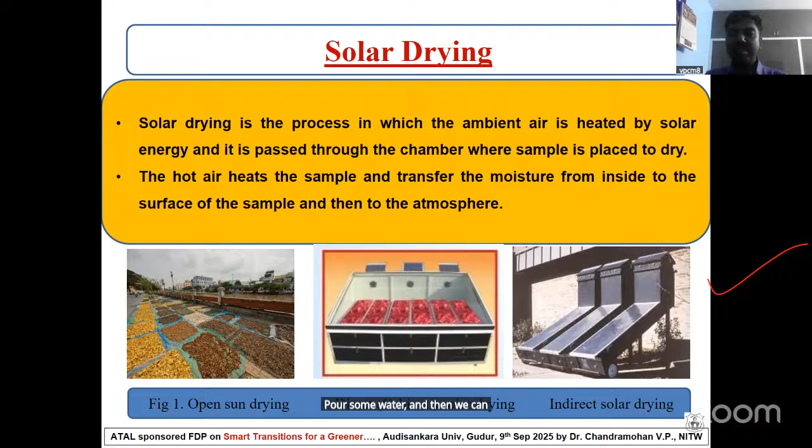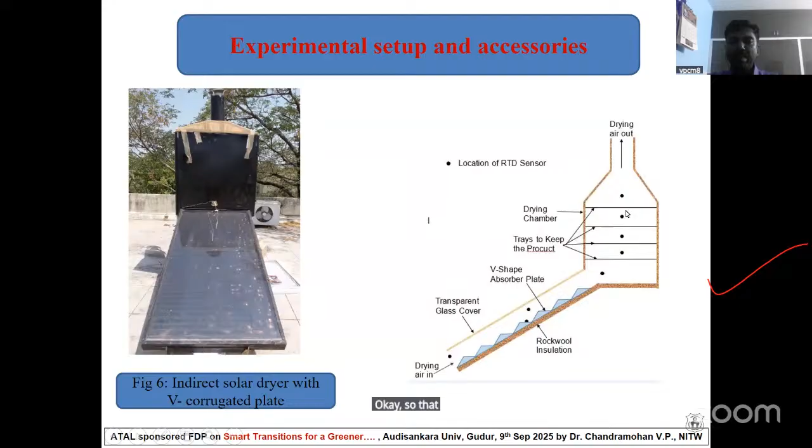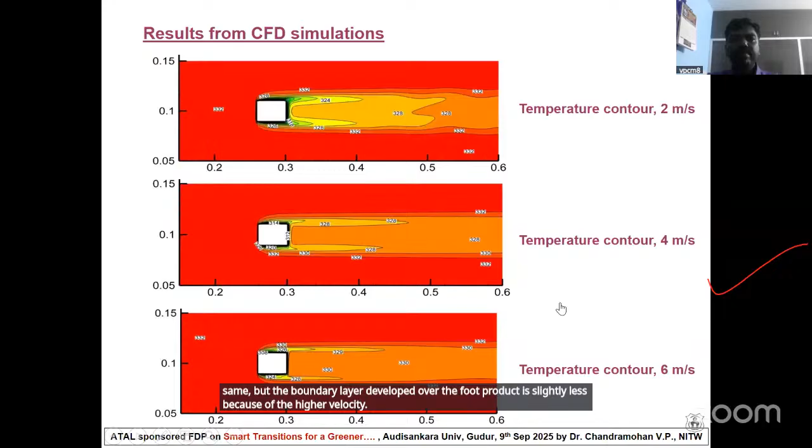So these types of studies help us understand how heat transfer will take place, how mass transfer will take place from the product. This can be evaluated with the help of CFD simulations. There is nothing more to explain here because 4 and 6 meter per second always produce a uniform temperature profile and a symmetric velocity profile.

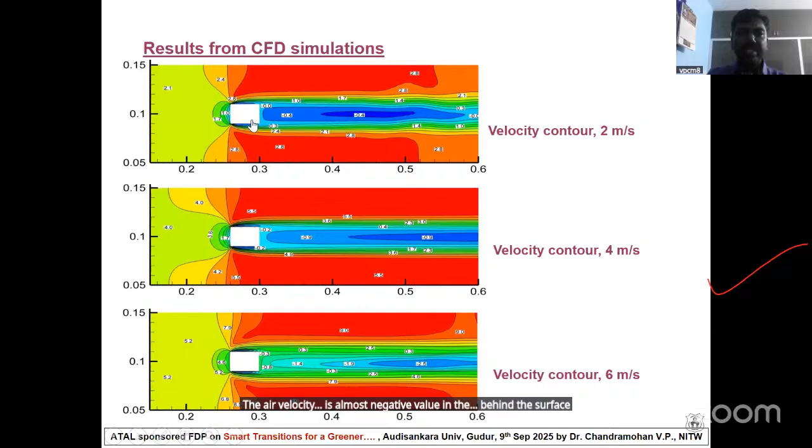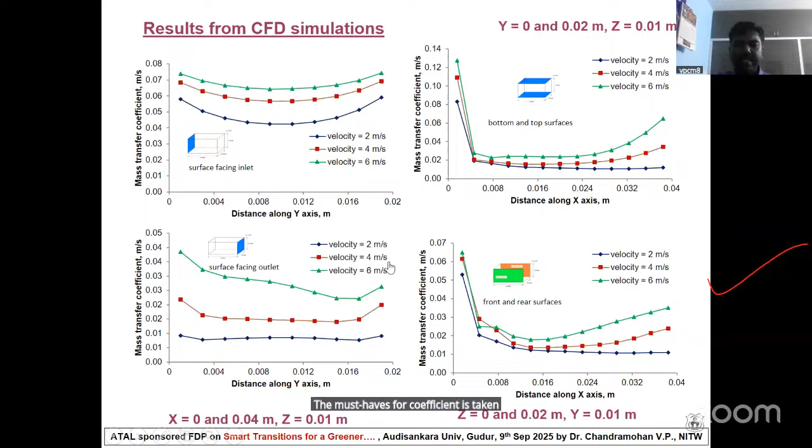Actually we solved this problem in 2007, 8 times, because those days the computers were not very effective to solve these equations. This itself was taking almost 7-8 hours, since it's a three-dimensional case, each simulation took 7-8 hours. But nowadays very costly, powerful computers came. Because of that lack of computers, we couldn't add the radiation effects. You can add radiation effects also, but then the code will be a little complicated. Maybe present day computers can solve it, with a little difficulty, but we can be able to solve it.

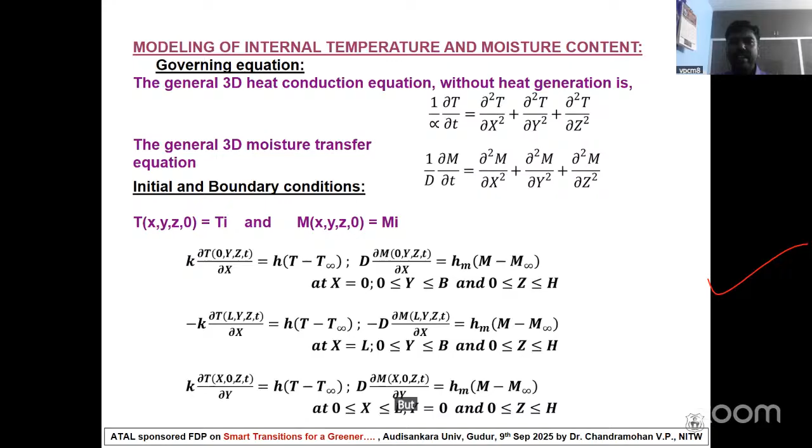So now I could visualize the temperature distributions inside the food product. I told you it's a rectangular object kept in the tunnel. In this case, you remember, there is a rectangular object kept inside.

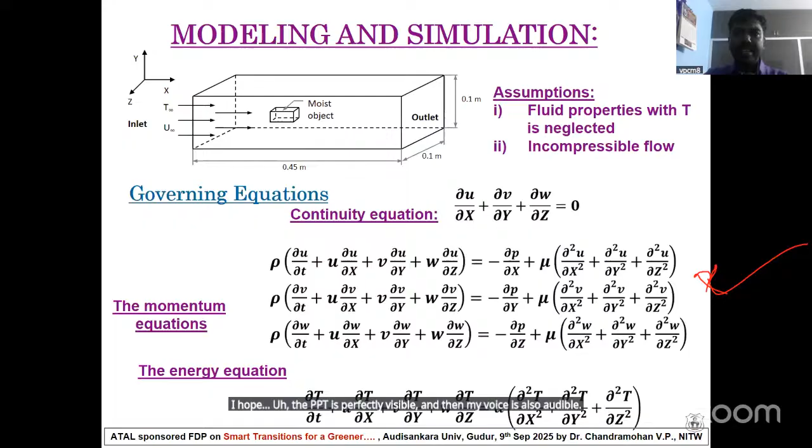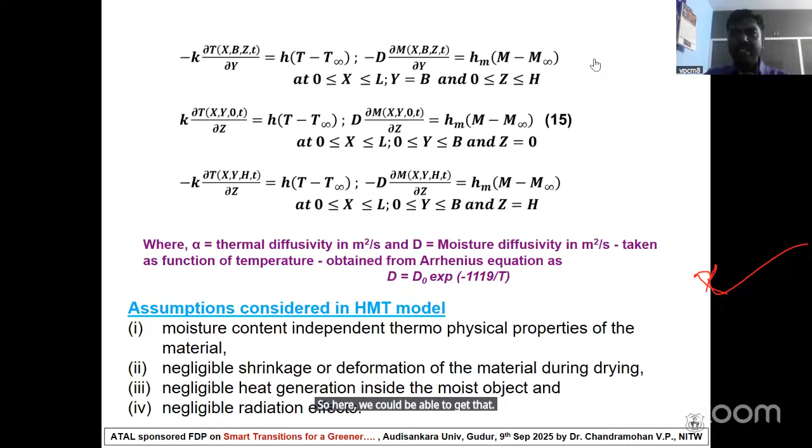In MATLAB, some inbuilt options are available. Some matrices can be directly taken by calling the subroutines, so you can solve it in MATLAB as well.

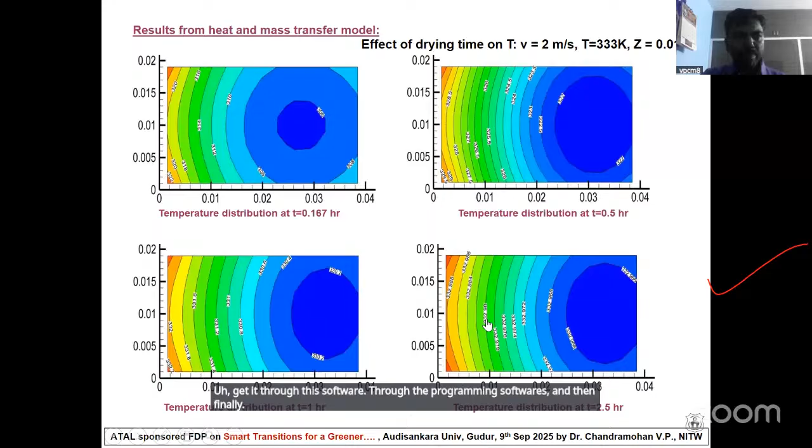It is natural - whenever we dry food products, it's a time-consuming process, it takes its own time. As time increases, the product temperature always increases. We could capture this natural behavior through the software, through these programming tools, and the results are plotted using the TecPlot software. So this is where we get the temperature distributions, for velocity at 2 meters per second.

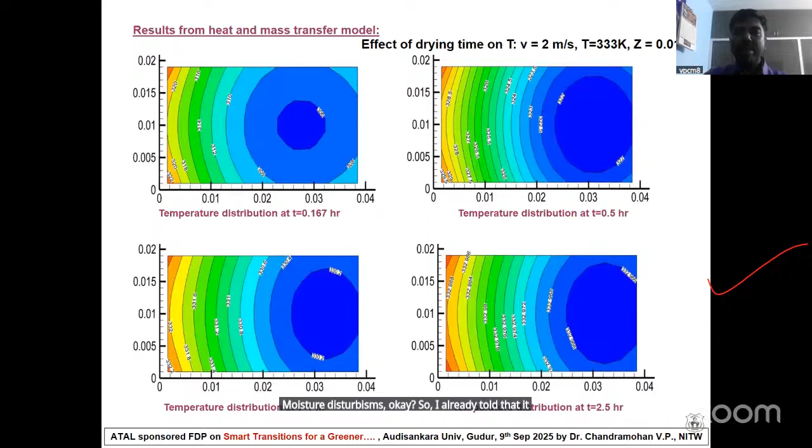Similarly, we could get the moisture distributions inside the food product. As I mentioned, it's always a heat and mass transfer process - when we solve the heat transfer equation we get the temperature distributions, and when we solve the moisture transfer equations we get the moisture distributions.

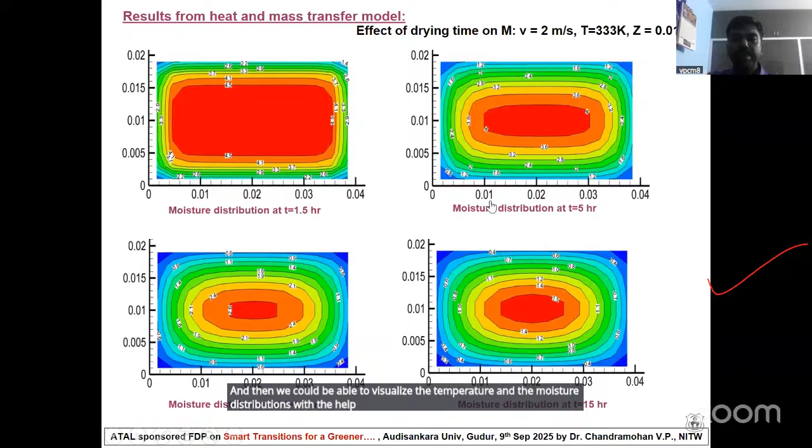So now this is another one we solved. I think it is a green pea. Did I mention it anywhere or no? Green pea. Yeah, maybe it's a green pea. Spherical food products. Green pea means Pache Patani in Tamil, and then in Telugu it is, what is Telugu? I don't know. Green pea.

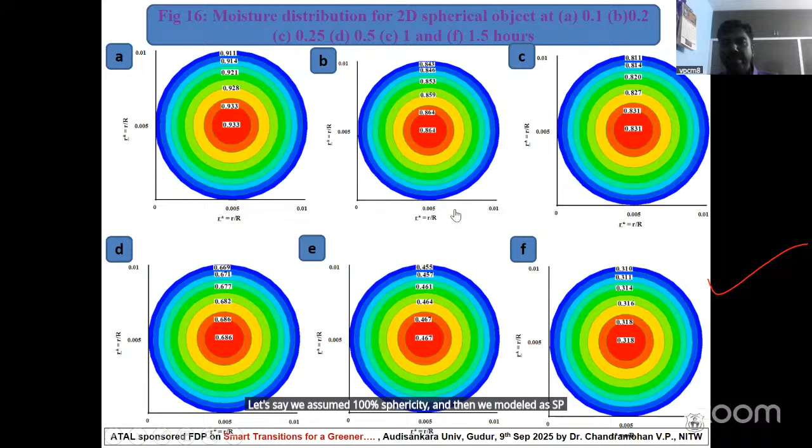Actually, green pea is not a perfect sphere, but we assumed it's a perfect sphere and then we solved the spherical equations. Previously, we have taken Cartesian coordinates, since it's a rectangle, potato is taken. This green pea is spherical, almost 95% sphericity is there. That's why we assumed 100% sphericity, and then we modeled it as a sphere, and then we could be able to get the temperature distribution inside.

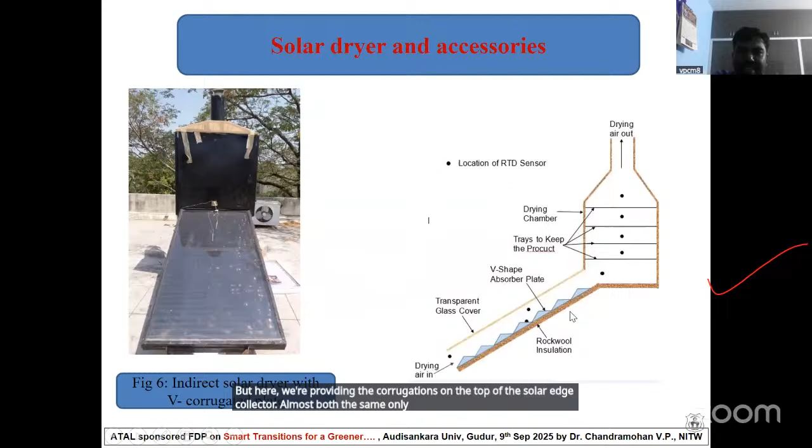So that also we are solving one by one by using the CFD techniques, and almost all the works are published, and still we are working on that. So here instead of a triangle corrugation, we are providing the square corrugations. The same problem is taken and we are solving here. Here the corrugation is on the bottom side of the solar air collector, but here we are providing the corrugations on the top of the solar air collector. Almost both are same. We are slightly tilting the device and then doing the CFD analysis.

1 minute. I will be checking my battery level. Yes, it is coming down. So 1 minute break I will take. I will connect the computer.

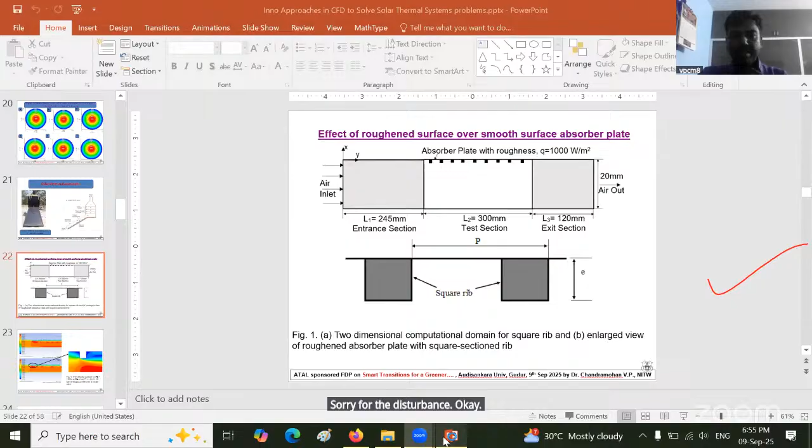Sir. Yeah, so here we are providing the corrugations, square corrugations on the top of the plate, and then we are sending the air. The remaining thing is everything is same. We are assuming here 1000 watt per meter square of solar insolation will be reaching to the surface, and then we have taken some entrance section, test section, and then exit section. The air is sent in at the inlet, and then air is sent out at the outlet.

Actually, this is the zoomed view of the two consecutive square ribs. The distance between the two square ribs is pitch. The pitch is varied in our case. In what pitch we will be getting the maximum heat transfer, that was estimated through the CFD analysis. And then this height also varied. The height is taken as a small e.

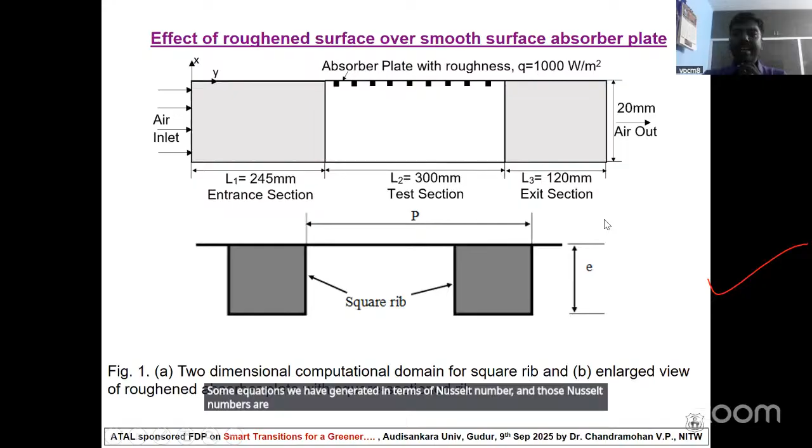So these things we varied, and then we could be able to provide the optimized pitch and height of the square corrugations. And then from that we could make some equations. Some equations we have generated in terms of Nusselt number, and those Nusselt numbers can be used directly in your system, and then we can estimate the heat transfer coefficient or whatever it is.

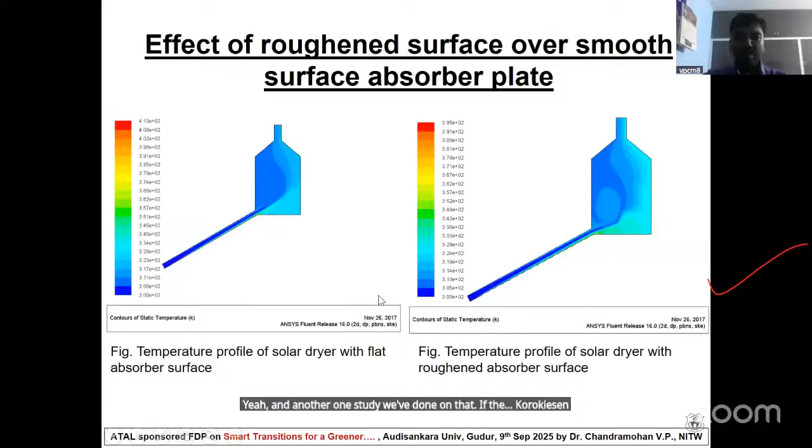Yeah, and another study we did on that. If the corrugation is a smooth one, smooth means theta is equal to 0 degree. The angle of the corrugations will be 10 degree, 15 degree, 20 degree. These things we studied, but we couldn't find much phenomenal development. But anyway, I mentioned it here; maybe it will be useful to you. You can also do similar simulations. If you change the angle again and sometimes get a better mixing of the air, then that may give a good result actually.

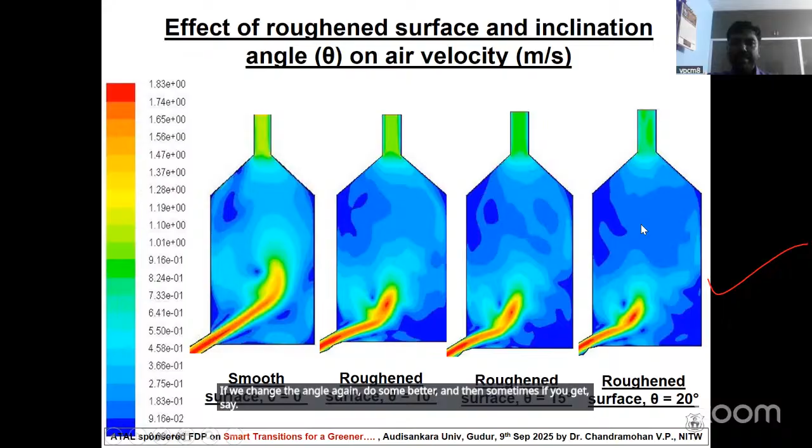Yeah, this is the inclination angle. Theta at 20 degree, 10 degree; 10 degree is almost giving some good mixture. 15 degree also it is okay.

This also shows the drying chamber temperature distribution inside. So this is the first setup, the solar dryer. Whatever I explained, we have done almost 10 CFD problems. All the works are already published. So there is still a lot of hope for solar dryer problems with the help of CFD.

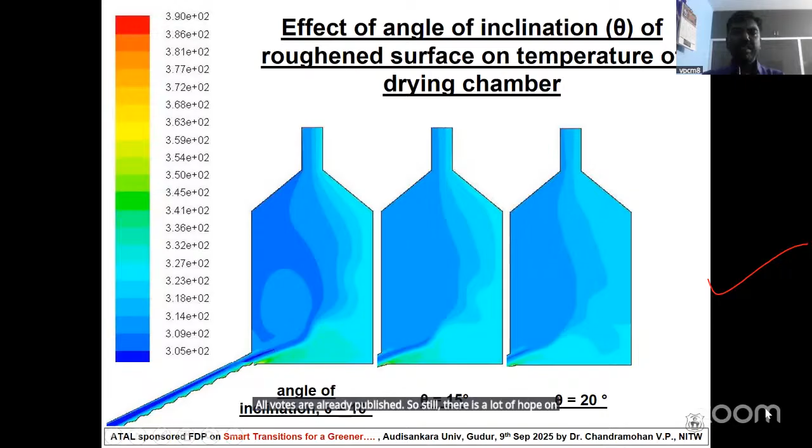The next work is the solar updraft tower.

So before going on to that, sir, shall we go through all the topics and then keep the question session at the end, or can we cut in between, sir? So we can finish it up, sir, and at the end of the session we have questions. Oh, okay, we will go on with that.

Okay, so the next setup is called the solar updraft tower. This we also developed in our laboratory. Laboratory means it's not a laboratory, it is developed on the rooftop of a building. Actually, this setup was first developed in Manzanares. The city name is Manzanares. They developed this plant in around 1985.

This is the tower or chimney. The chimney height is almost 194 meters. They didn't construct all of it. Some portions of the chimney were constructed, and for some portions they took the help of a real hilltop, because this plant was developed on a hilltop. In the hill there is a natural hole, and in some places they provided chimney sections, and in other places it is the natural hill.

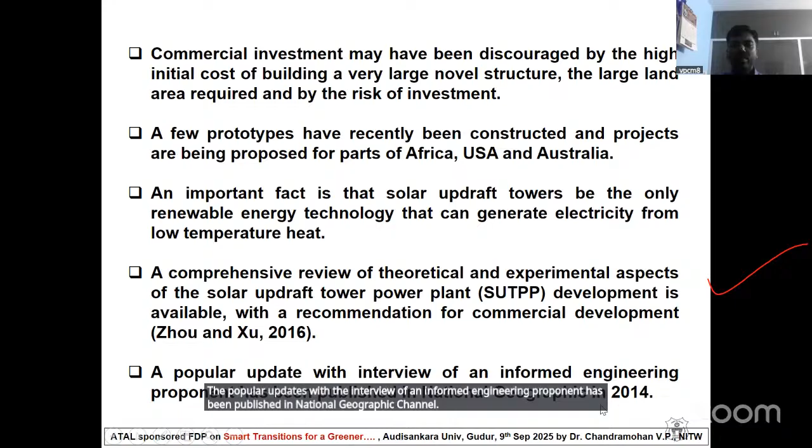Okay, so already one review work is reported in 2016 by Zhou and Xu A popular update with the interview of an informed engineering proponent has been published in National Geographic Channel. One video is there in the National Geographic Channel. Already I have seen that one. There are some design factors that must be taken care of here. The power output depends primarily on two factors. One is collector area and another one is chimney height.

Okay, the collector area is as large as 7 kilometers diameter. So could you imagine, 7 kilometers diameter. Such a huge circle is needed. So is it possible in cities and towns? It is not possible. But even in cities some secluded places will be there. A 1 kilometer diameter solar air collector is planned, but 7 kilometers is not possible. Then we need some rural areas or desert areas. In those places we can think about this 7 kilometers diameter plant.

And then the largest chimney height is up to 1 kilometer. Is it possible? 1 kilometer height chimney. Have you noticed anywhere a chimney height of 1 kilometer? Any industries? I could see around a 500 meters chimney in Hyderabad. There are some coal power plants there. Cement factories are there. They are using very big chimneys. Whenever you see it naturally, the height may not be visible, but the real height is almost 500 meters. Such type of construction is needed in this case also. Then we can extract more electrical power.

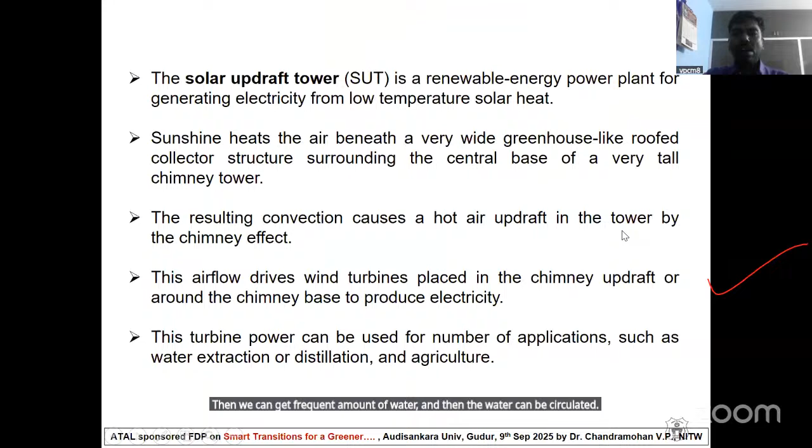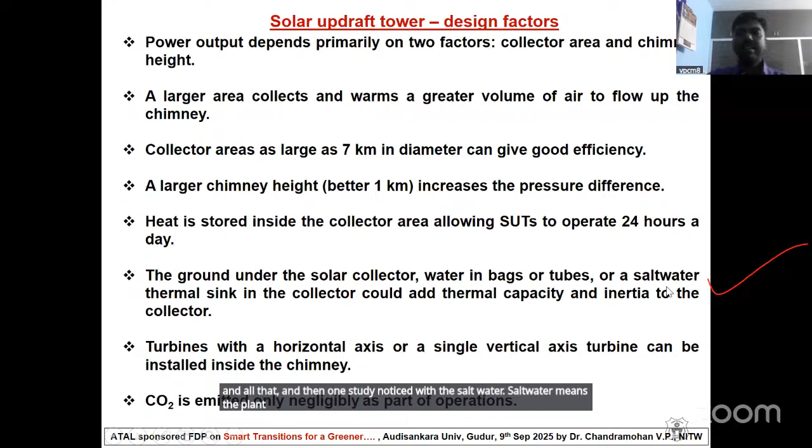Water tubes. If the solar air collector diameter is almost 7 kilometers, then we need to lay a lot of water pipes. Then it is sometimes tough to get that much water. Then that plant must be kept near seashore areas or river shore areas. Then we can get a frequent supply of water and the water can be circulated. I noticed one such study with water bags or tubes inside. And then one study I noticed with salt water. Salt water means the plant is kept near the seashore and therefore they are taking the salt water.

Okay, the concept is almost the same as the concept of a nozzle or diffuser. The purpose of the nozzle is to increase the airflow velocity. If the airflow velocity is more, then the air has more kinetic energy. Then the turbine blades can extract more kinetic energy. Therefore, it can produce more speed. Therefore, we can extract more electrical energy. That is the concept we are using here.

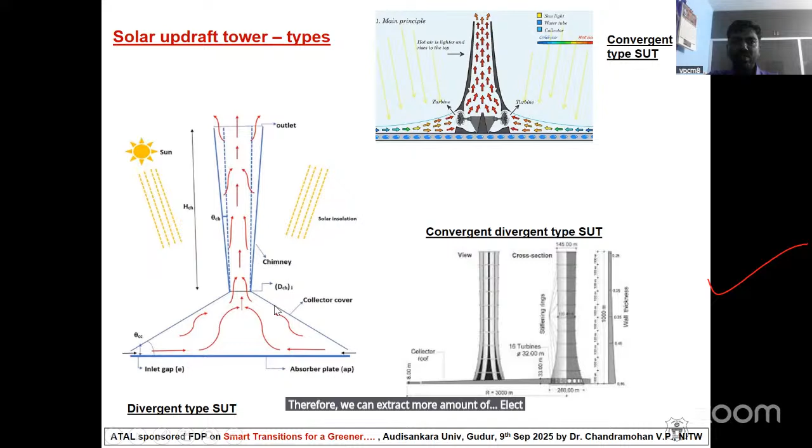Different types of plants are used here. Now we have used CFD techniques, and we solved the same problems, and then we could get the velocity distributions and streamline distributions inside the setup.

The system must be modeled using modeling software. ANSYS has modeling software, or you can go with SolidWorks or CATIA. Then the model can be incorporated in the CFD tool, and we can run the simulations. In the simulations, we need to solve the normal governing equations like energy, momentum, and continuity equations, and then we can get the velocity and temperature distribution inside.

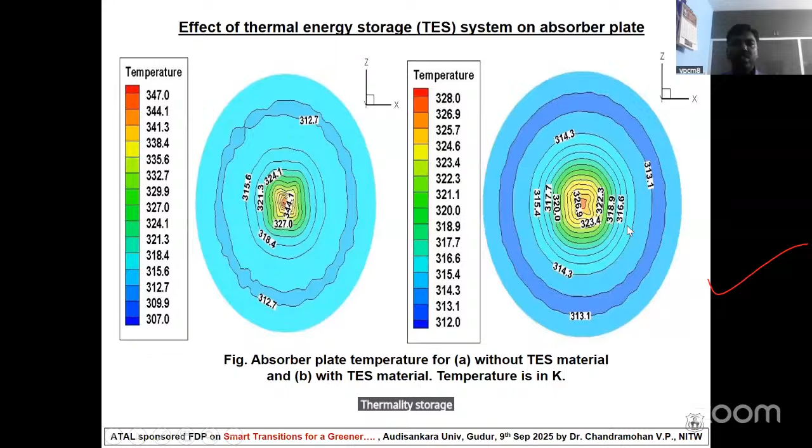This is the effect of the TES system 1 centimeter above the absorber plate. This is the air temperature, not the absorber plate temperature, how the air temperature looks just 1 centimeter above the absorber plate. Here the maximum air temperature is higher, almost 340 Kelvin at the center of the domain without the TES system, but with the TES system, the temperature is 318 Kelvin only.

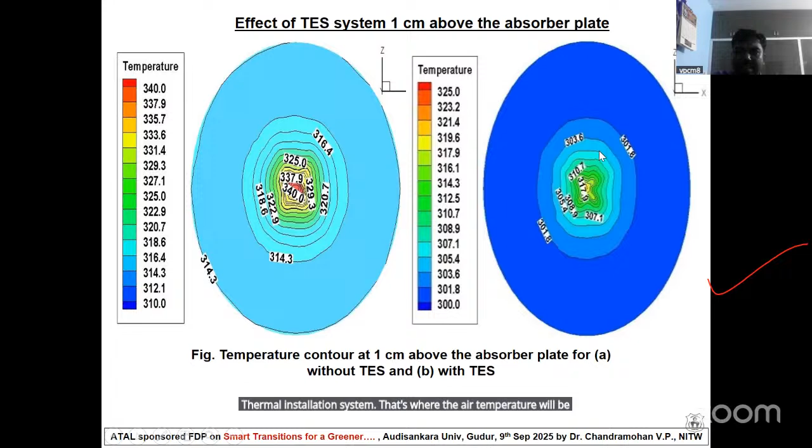The reason is the same, because if you keep a thermal energy storage system, the copper plate absorbs the heat and conducts it into the thermal energy storage system. That's why the air temperature will be somewhat less with the TES system.

But at the same time, if you provide the TES system, the system can run even after sunshine hours. Even after 5 o'clock, even at midnight or beyond, the system can run. Without the TES system, we cannot run the system. That is the only disadvantage of the first system. The advantage of the second system is it can run round the clock.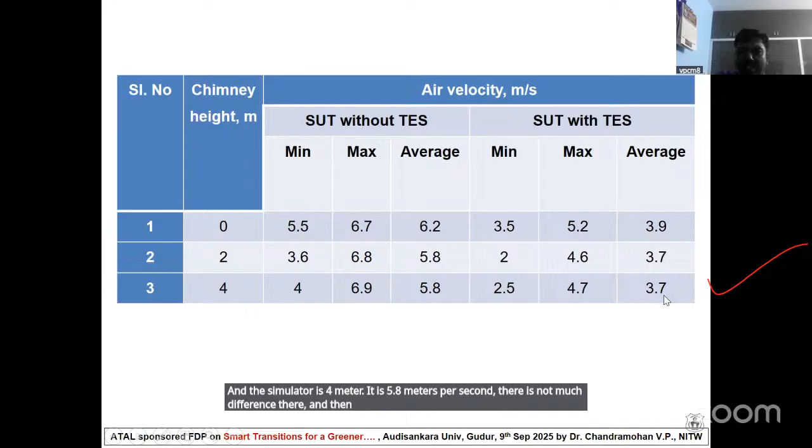At the same time, with the TES, the maximum average is only 3.9 meter per second. When the height is increased to 2 meter, the average velocity is 5.8 meter per second without TES, and reduced to 3.7 meter per second with the TES system. When the chimney height is 4 meter, it is still 5.8 meter per second, not much difference, and average also 3.7 meter per second with TES. There is not much variation.

So now the influence of the chimney height. Actually, in our system, we developed up to 6 meters only. If the height is increased beyond that, how will the air velocity increase? So three different locations: at the inlet of the chimney base, inlet of the system, and outlet of the chimney. At these three locations, we estimated the air velocity for different heights.

You can see when the height is increasing, the air velocity is always increasing. If the height of the chimney is increased to 10 meter, 20 meter, 30 meter, 50 meter, 100 meters, 200 meters, we'll be getting an enormous amount of air velocity. That is the conclusion we could get here.

And then the collector roof angle. So here the collector has an angle. This angle we adjusted for different simulations. It ran for 10, 20 degree, and then 25 degree, 30 degree, 35 degree, like that we did different cases. There is not much variation in the maximum air velocity. This shows that this angle we have chosen based on Warangal's latitude and longitude.

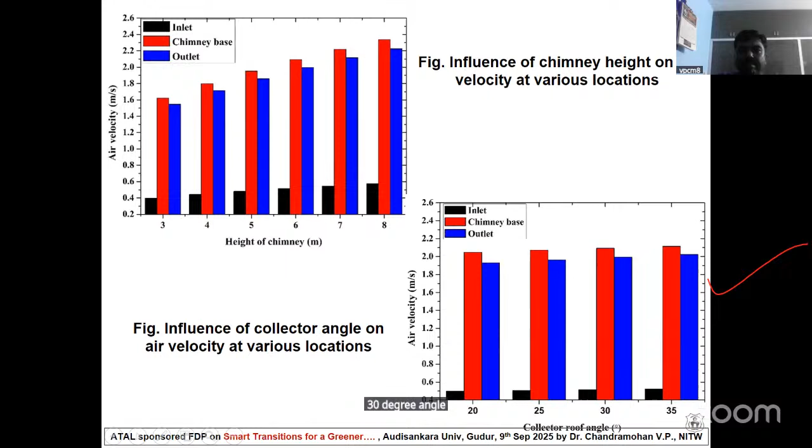The effect of absorber plate diameter on air velocity. Actually, the diameter we chose is 3.5 meter. But if the diameter is increased from 2 to 12 meters, you can see the air velocity is always increasing. Therefore, in the theory they told that there are two important parameters: one is diameter of the collector, and another one is height of the chimney.

Now I could estimate the volume flow rate, velocity, theoretical power output, actual power output, overall efficiency, and chimney efficiency for different chimney heights. When the chimney height is increasing, the theoretical power output always increases, actual power also always increases, overall efficiency always increases, and chimney efficiency always increases. This shows that if you take a good height, we can get a very good overall efficiency.

Anyway, these heights could produce very small power output only. The maximum is 0.3573 watt theoretical power. Actual is 0.238 watt only. If the height is increased, we can get a good result. We can do the simulations for those things also, and we can estimate the overall efficiency.

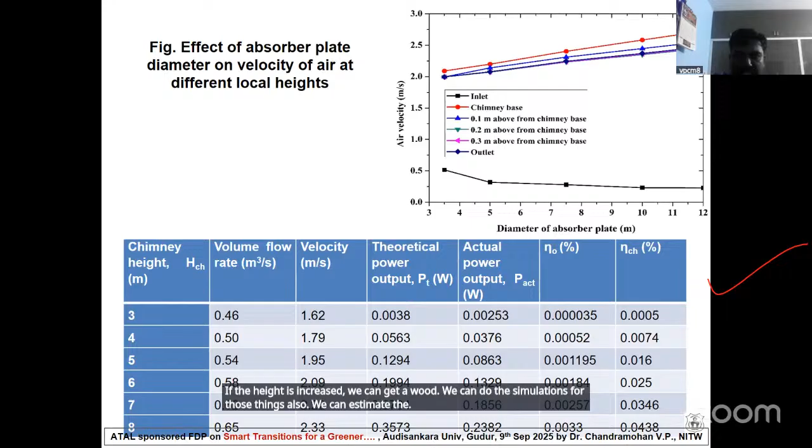Yeah, this is the case we estimated. I think this is the temperature profile for different inclination of the chimney. So this is a straight chimney. The angle of divergence will be increased - 1 degree, 2 degree, 3 degree, 4 degree, and 5 degree. If the angle is increased, then how the profile changes.

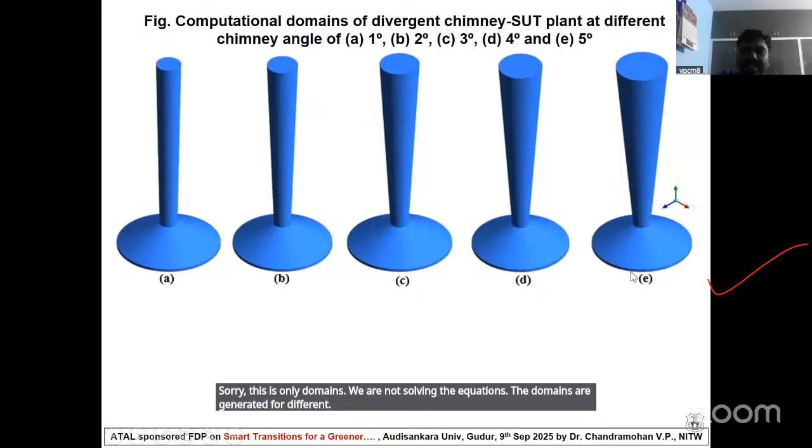This is only domains; we are not solving the equations. The domains are generated for different angles, and then we could get the velocity distribution here. When the angle is 1 degree, the profile is almost good, and we are getting an almost fully developed profile. When the angle is 2 degree, also it is almost okay, same with 3 degree, 4 degree.

But when the angle is between 4 degree and 5 degree, the air velocity is not able to reach the top of the chimney. There is always some instability noticed in the air velocity. Therefore, 4 degree, 5 degree may not be fit.

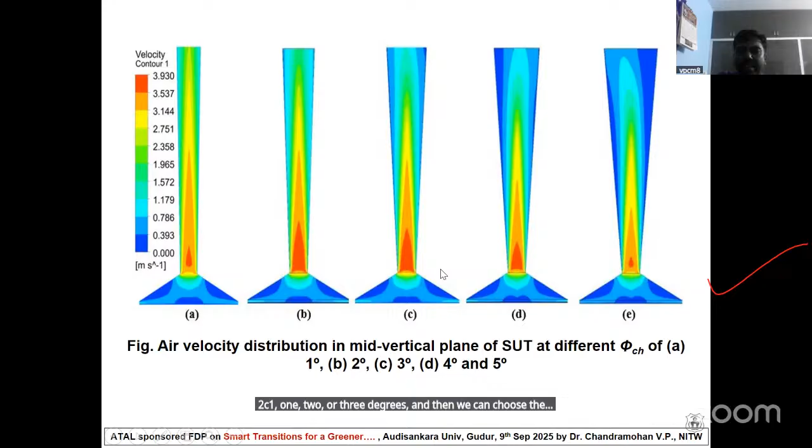Then we can choose anyone - 1, 2, or 3 degree - as the chimney angle. For different chimney angles, how the actual power, theoretical power, and overall efficiency vary - we ran the simulations and found that 4 degree is somewhat better, producing almost 1.35 watt theoretical power at 4 degree at 600 watt per meter square. If the solar insolation increases, this value also increases, but still 4 degree angle is better. If the angle is increased to 5 degree, the value starts to decrease, meaning further increase of angle will not help us.

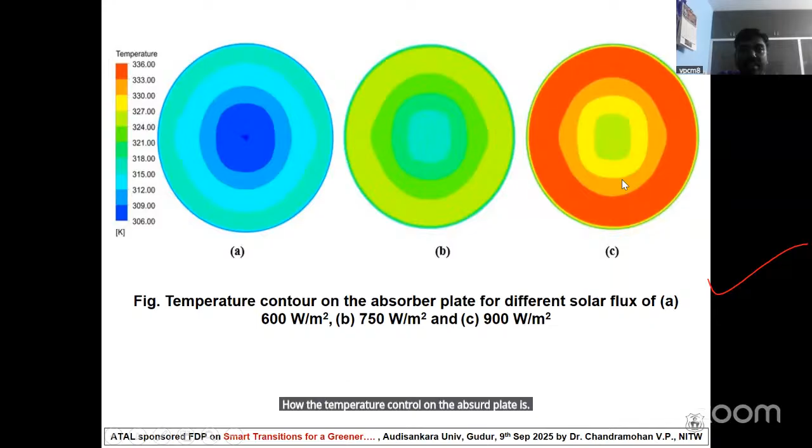The overall system efficiency is always increasing when the ambient temperature is increasing. We need not go up to 320 Kelvin because ambient temperature in some Arab countries goes up to 55 or 58 degrees Celsius. In India, it's maximum up to 45 or 47, but still we did the analysis. It may help for other countries.

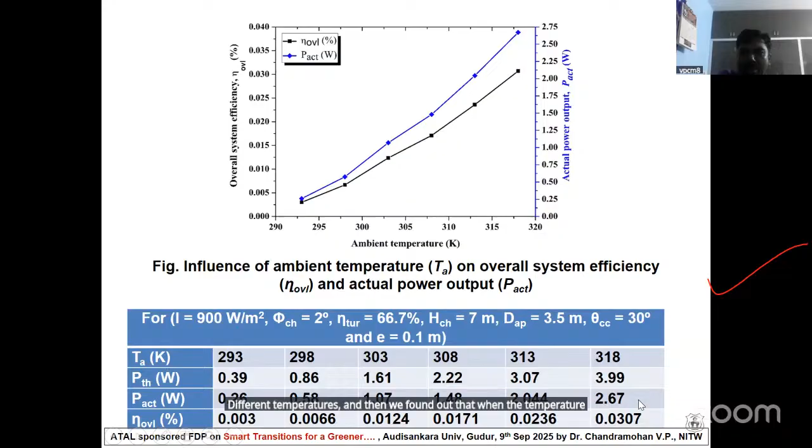The actual power output is estimated for different temperatures, and we found that when the temperature is increasing, the actual power output also increases, and the overall efficiency also increases.

The next one is the solar vortex engine. The limitation in the solar updraft tower is that we need to make a very high chimney. But in the solar vortex engine, a similar type of solar air collector is provided, and here a solar vortex machine is generated.

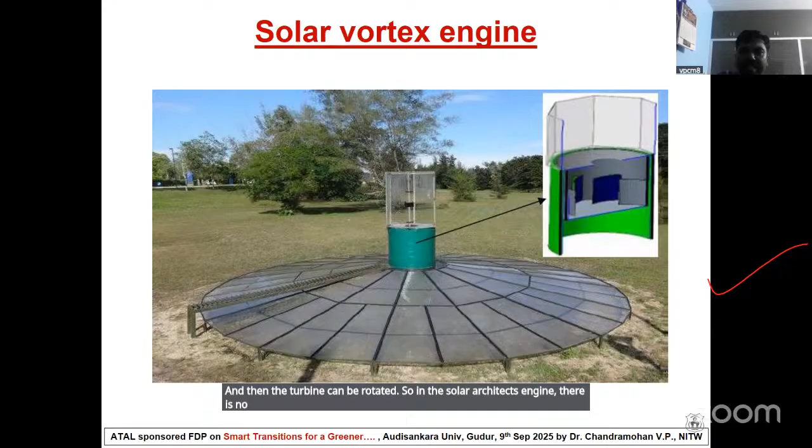This is the diagram we have made. This is the solar air collector plate, and this is the solar vortex plate. This solar vortex plate is zoomed in this way. The air will be entered through the slots - these are the air slots with the fixed blades.

The air ends up inside, and there is a natural tornado - it is called a tornado. A natural air tornado is generated, and it passes through the top hole, moving through the external bounding structure, called EBS.

So here, if you keep the turbine in this place, the turbine can capture the maximum quantum of kinetic energy, and then the turbine can be run. This is the concept we developed in the solar vortex engine.

Actually, it is still in the developing stage. We are not developing a real setup, but we run simulations. This concept was developed a very long time back.

Actually, the prototype was developed by Michaud team. They developed prototype one and then prototype two. In the prototype, they used agarbatti smoke, and the smoke comes towards the top hole like that.

So we ran the CFD simulations, and we could get this type of air profile from the top plate. We could also confirm that whatever the Michaud team developed, the concept is fit for the real setup - through the CFD simulation we could get this.

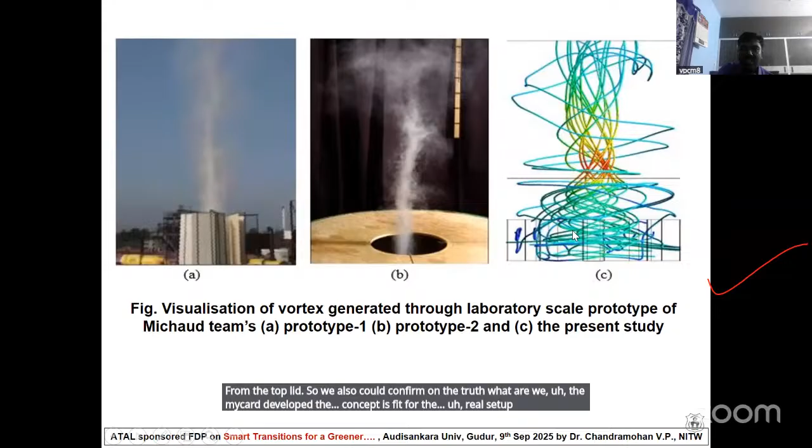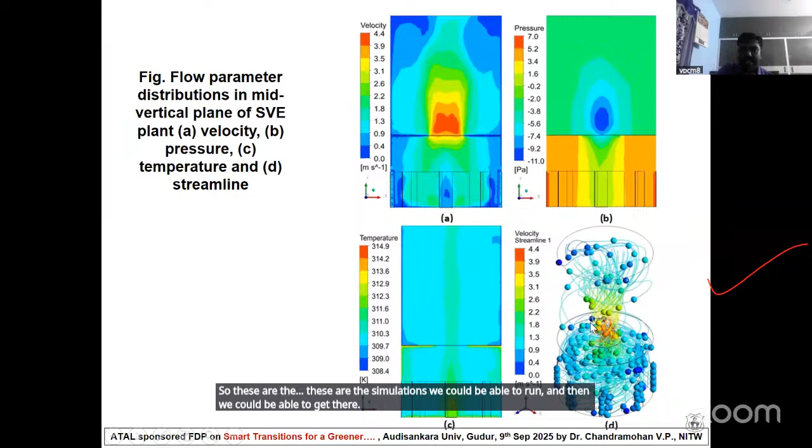These are the simulations we were able to run, and we could get the velocity profile like that. Based on that, we could provide different simulations.

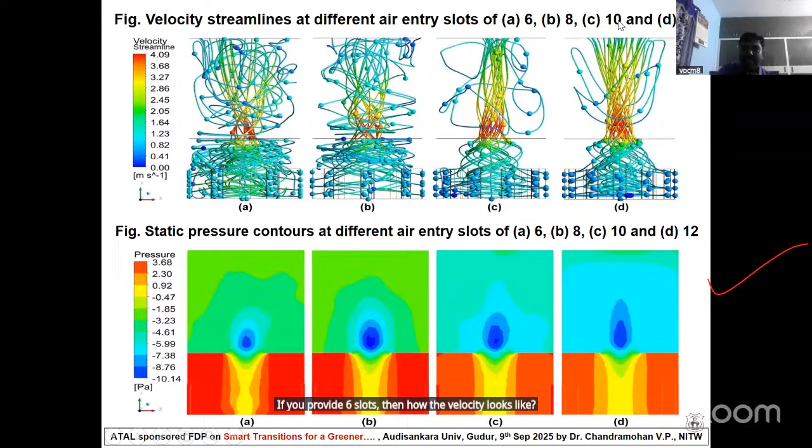Yeah, these are the air velocity natures for different slots, different air entry slots. In the circular plate, if you provide 6 slots, then how the velocity looks like, 8 slots, 10 slots, 12 slots, like that we could be able to run different simulations.

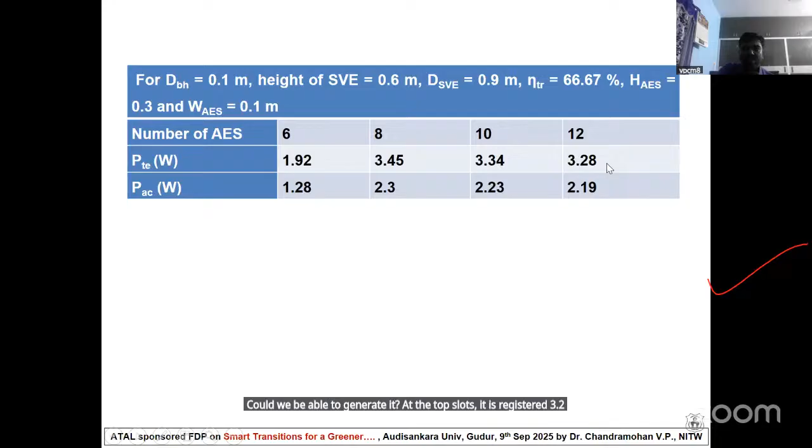Finally, we could be able to come to the conclusion. The theoretical power developed is higher in the 8 slots, 3.45 watt power could be generated. At 12 slots, it is reduced to 3.28. It shows that more slots are not necessary. So the problems can be extended in any way using CFD techniques.

So these are the tools usually we are using: ANSYS ICEM CFD, Fastest 3D, ANSYS Fluent, TecPlot 360, Minitab 16, DataFit 19, and recently we are using COMSOL also. And these are the programming tools: Fortran, MATLAB, Python, C++ also we are using.

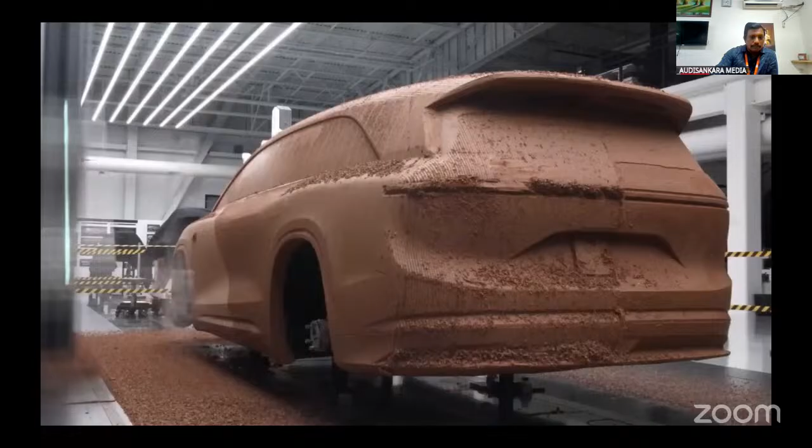Now the volume is not there. You are not able to hear the volume now? Yeah. Now we cannot get the volume.

So are you working on the volume? I think that might be an issue with the internet, Manoj. Probably you couldn't hear much volume. Okay. Is it on and off? It's okay. It's more the background music. It's fine. So I will explain it in the next coming slides: our journey, what we have done and what we are going to do in the future. Okay, no worries. Yeah, thank you.

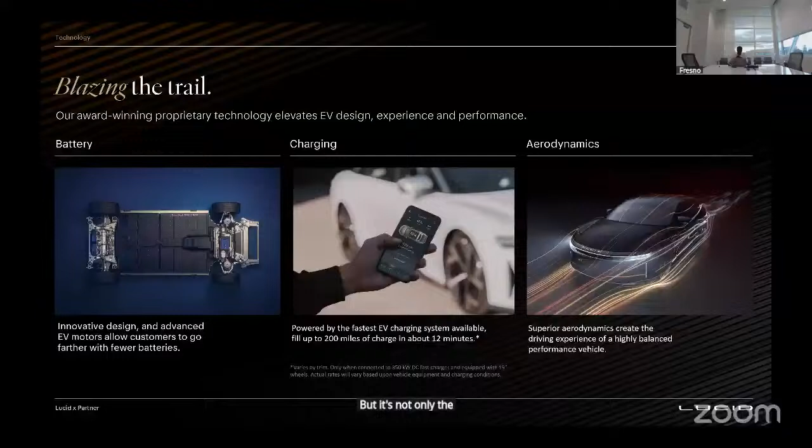Next, I would like to talk about the core technologies that drive sustainability in electric vehicles. When people think EV, the first thing that usually comes to mind is the battery. Of course, battery technology is a central part of the EV, but it's not the only factor, correct? We need good aerodynamics, so the car cuts smoothly through the air. And of course, battery innovation: we need an energy-dense battery. And we need to meet charging efficiency.

And the next one is charging systems, because we need to have fast charging, which needs to be accessible to every one of our customers. So why this matters specifically from a sustainability point of view is because every small efficiency here compounds into huge lifetime savings with respect to sustainability, correct?

For example, if I talk about the aerodynamics, which may look like a design choice, the simple fact is that improving the vehicle drag coefficient by 0.01 definitely adds 5 to 10 miles of range in the vehicle, which means with less battery, with less energy, the vehicle drives a little bit longer. So that is how sustainability relates to this kind of technology.

So that's why, when we say blazing the trail, that term is not just marketing, it means leading the way. We are rethinking the entire fundamentals as a system as a whole. So that is the point over here, okay?

So one of the key reasons we have been able to lead EV technology at Lucid is because we make most of our critical systems in-house. We don't buy from external vendors like China or whatever other OEMs do, because everything is in-house technology. I will highlight a few of the things. One is the battery pack, which is very lightweight and thermally managed, because heat control is very, very important with respect to the battery pack.

So of course, these are the key awards which Lucid got. Definitely the external recognition also matters, correct? Our car won numerous awards with respect to efficiency, design, and performance. These are all by legit independent reviewers. So definitely we have one of the best products.

So the key takeaway here, with respect to our subject, is that system thinking and sustainability are not just buzzwords. That's what I said earlier. They translate into measurable recognition. So these things specifically prove we are on the right track.

I quickly talk about Lucid first before jumping to the subject. Bear with me. It is not just marketing. You need to understand what we do. Then I can talk about the concept, system thinking or model-based systems engineering, and how it helped to shape this entire product line. So that is the main point over here.

Okay. So let's talk about our product lineup. We started with the Lucid Air, which is a luxury sedan focused on long range. After that, we shifted gears to the Sapphire model, which is a performance variant for customers who love speed and acceleration. And now we have the Gravity, our flagship SUV that balances range and performance as well as versatility. Each of these products targets different customer needs, but the catch here is that more variants definitely means more complexity. That's the key here. Okay.

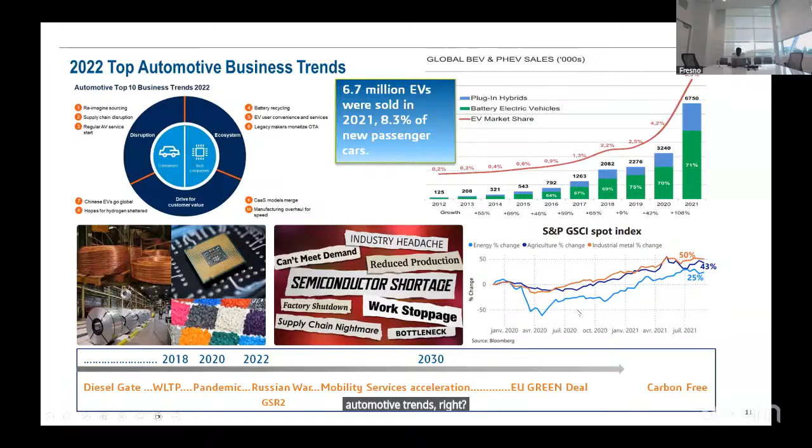Okay, exactly the same thing I'm going to cover on the next slide, which is about automotive trends. Just bear with me. I have. Okay, so I want to talk about

Okay, let's zoom out and look at what is happening around us. Mobility itself is going through a lot of revolution. Sometimes it is something we used to call a re-evolution. Why? Because it is not just making cars anymore. We are redefining the way mobility is going towards the future: how people move, how they connect, and how they consume mobility.

Traditionally, in our older days, we just bought a car and after that it was just regular maintenance. But today mobility is something like an ecosystem, especially in the Bay Area or Texas. You might have heard the news. Already we have Google's Waymo, Amazon's Zoox, and Tesla's robotaxi. We even have our own ride sharing program along with Uber.

So it's more about subscription models, connected services, and over-the-air updates. And it all needs to be integrated with the cities. Each city has its own regulations, so everything needs to work together. So mobility today, especially in the EV space, is not about evolution, it is really a revolution for us. What that means is the value is no longer just a hardware product, not just a car. We need to think about the data, the connectivity, and the services that support the entire ride sharing ecosystem.

So what is the key problem with traditional versus systems thinking? Let's be honest here. Most traditional organizations, especially in the engineering world, are structured in silos. Mechanical engineers work in one department, and electrical, it's like our college: mechanical engineering, electrical engineering, software, and manufacturing. So everything is in silos, and each group optimizes their own piece of the puzzle.

If you take mechanical, they are mostly focused on weight and design optimization, etc. Electrical and everyone else are working in silos. The main problem here is when it integrates together, that's where the complexity starts. Together it may not work in a perfect world. As our CEO always says, when we work like that, it's a local win, but it is a global failure.

So that's what our CEO always encourages us to do: more system thinking, work in collaboration, and do model-based systems engineering rather than file-based. So that is the main concept here. Okay, so let me give you an example which we practically had.

One of our motor teams started changing the winding for greater performance. But that particular change drastically increased the heat load. Because they worked in silos, our thermal team was not well informed. They had done certain calculations, but because of that, the battery got overheated. So now the battery team came into the picture and had to solve the same puzzle.

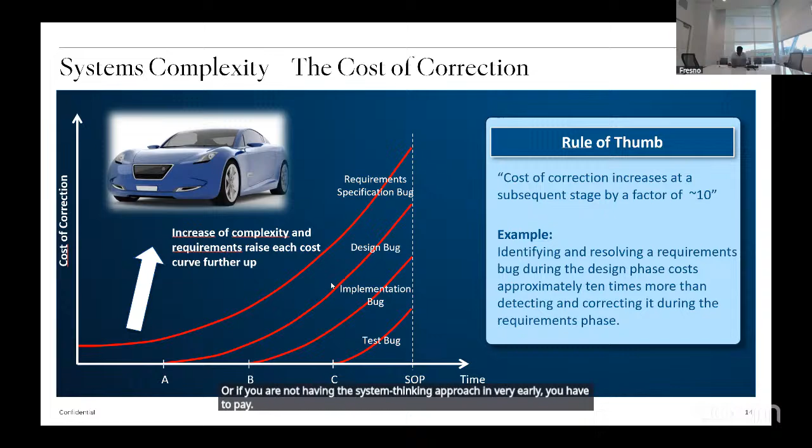Okay, so what is system thinking? Let's go with the basics. System thinking is about seeing the whole, not just a part. Instead of asking, does my component work, in our entire company we ask how this component interacts with other components, like how the battery interacts with the motor, and how the motor and battery together are controlled by the software. So we have to think as a whole.

It is pretty much a mindset shift, because most of our engineers come from traditional automotive. They have worked in silos because it's a big company with a lot of individual teams. They focus through their own lens. But as a startup and small organization, we are building our company from the ground up.

So everyone needs to do everything. Everyone needs to understand everything, each other's elements, so we can work as a team in a collaborative manner. The main key here is that the system thinking approach changes the mindset from working in silos to a collaborative way.

Systems thinking is not just any tool or process, it is also a mindset. When you adapt it, you discover a lot of unknowns very early, and you understand the power of integration. That's the main key. This was very difficult earlier for us because everyone comes from a different background and different mindset to bring everything together. There's a lot of investment we have to spend on OCM, which is organizational change management mindset. That is the key.

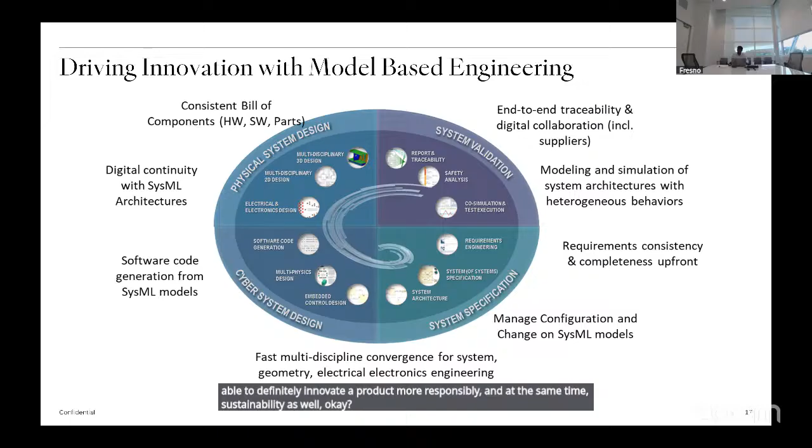One of the most common questions here is, do we have to use the same tool to achieve this MBSE? Most of the time, no, because every team has its own tool, and our main goal is to federate the information into the same form and shape as output. Whatever outputs come from individual teams - mechanical engineer, electrical engineer, software engineer, manufacturing engineer - they use their own tool, but those outputs are connected through the shared model in terms of requirements and interfaces, so we get this holistic view.

So most of our CAD teams use their CAD modeling software, either ProE, CATIA, or NX, and the electrical and electronics teams use their specialized tools like OrCAD or other tools specific to EE. The software team mostly uses Jira or GitHub, or now plenty of other tools, but all of them in some shape or form are connected through the system modeling tool as output to track this entire traceability.

So the key takeaway here is, they can still work on their specialized tool, because we are not asking them to come into one single source or one tool. We are mainly trying to federate that information to take a better decision. So it's not about forcing everyone into one tool, it's about federating the information so we can connect them well and take a better decision.

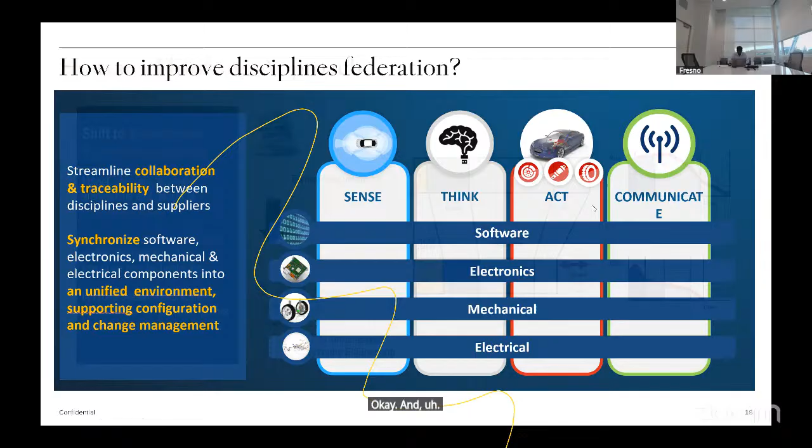Okay, and the next concept which we talk about is the system thinking approaches. I'm going to introduce another very important concept in systems engineering which we follow - shift left.

So what this exactly means in our automotive or industry world is, traditionally all our validation and testing happens late in the process. Once my design is completed and prototypes are built, they do the verification and validation. So by that time...

The fix is very, very expensive. So what shift left means is bringing the validation parts much earlier. Instead of spending a single penny with respect to hardware, we use these models to do the feasibility in the concept stage itself, which is something called advanced engineering. We do the engineering in an advanced way using systems thinking and more MBSE tool sets.

This helps us without making any actual hardware to do the test. We do it digitally using virtual simulation or virtual validation, etc. And of course, we validate the entire requirements within this digital tool, so we can understand, because each of these requirements is written by multiple different tech specialists specialized in those fields.

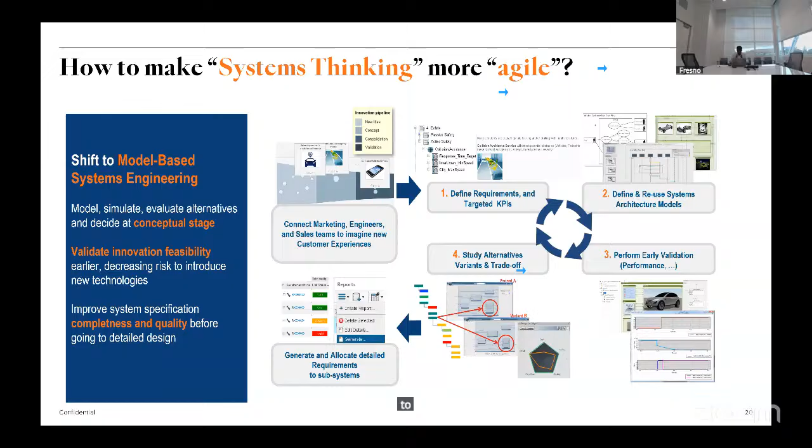So the formula here is: system thinking is not just something technical, it's a mindset. MBSE is a methodology. But put together, it definitely creates the collaborative backbone to connect all these different silos into a single source.

So that's where the traceability is produced. Any point in time, any of my engineers can click a button in the CAD. If I open one of my design components and I want to see the navigation, automatically my system will show what is the connected requirement, what is the connected DFMEA, and what are the connected test cases, which revision of the design is connected with which requirement.

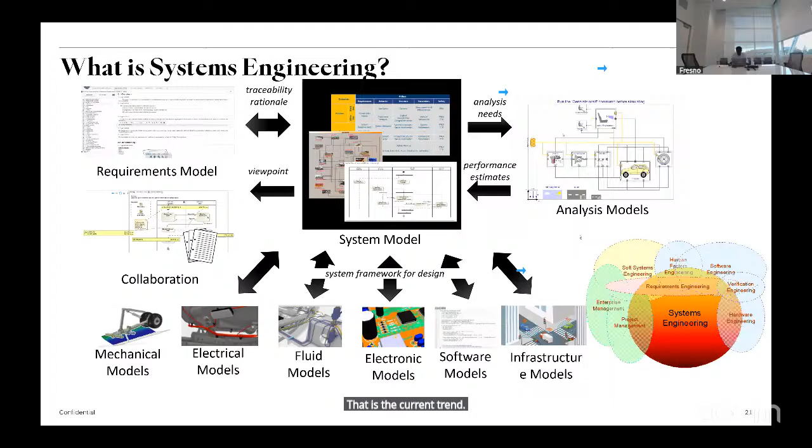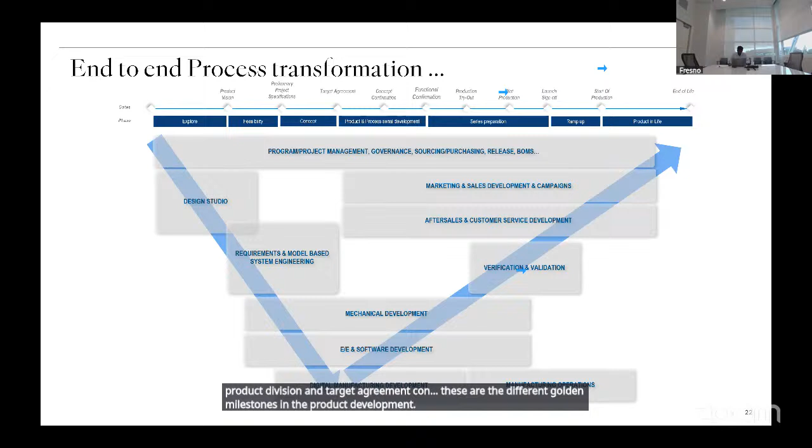Okay, so let's talk about, I think pretty much all of you might have understood the end-to-end process, correct? With respect to the entire product life cycle, any company has these product vision and target agreement. These are the different golden milestones in product development. In most organizations, including Lucid, we still treat development like a relay race, correct? The requirement, once defined, we throw into design. They do the design, then we throw it into manufacturing. Then finally it goes to testing, then to the customer, then service, correct?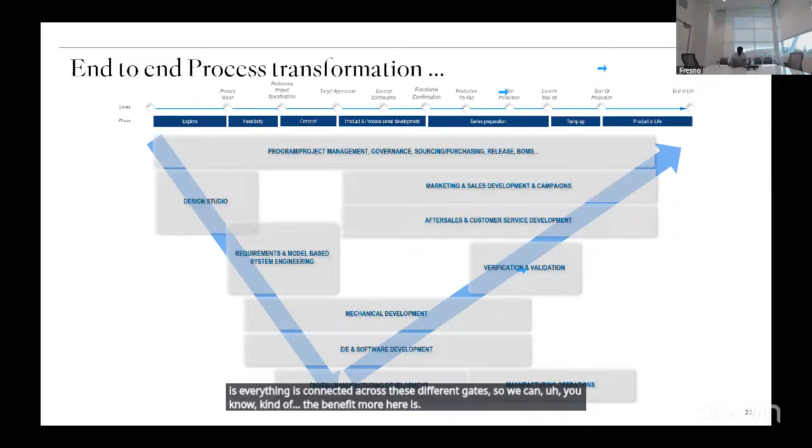The problem is every one of these handoffs creates some sort of silos as well as data loss. By doing this digital thread approach, what it is helping us with is everything is connected across these different gates, so the benefit here is in the concept stage itself, we can involve our manufacturing team. We used to call it a SE team. So at every stage of these milestones, there is a simultaneous engineering team which comprises all of these people, sitting and giving the sign-off.

It is not requirement engineers, then it goes to design. At each of these milestones, these SE teams, another concept we introduced here called simultaneous engineering team, comprise all of these people who will be part of each and every decision throughout the product life cycle. Even the SE team is not just a team. Without the data, the team does not make any decision, correct? So these MBSE concepts give them the data points to make better decisions. That is the main value.

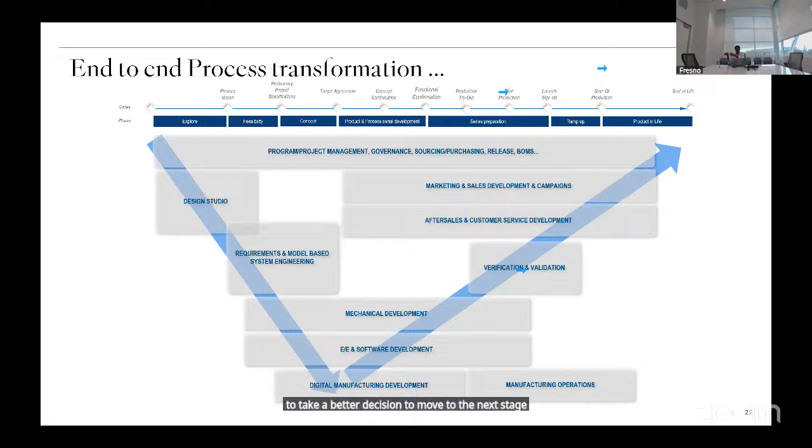So what I'm saying here is the gates should not be walls, they should be connected doors. That's the concept on the MBSE side. At every gate, everyone will be informed and involved to take a better decision to move to the next stage. So when it comes to their work, they are very much aware of what decision we took earlier as a team. So they know what the deliverables are. It will be smooth and quick, so they can move to the next stage. Okay.

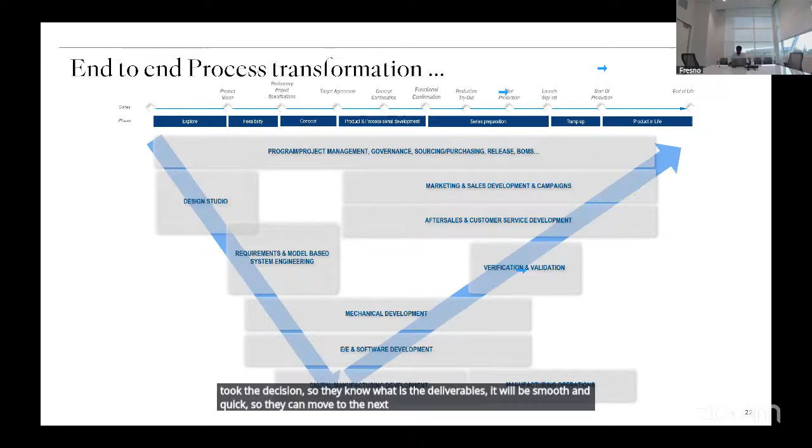So this is a very complex V model with respect to EV engineering. We tried to put it in a simplified way. If you see here, there are a lot of teams involved, starting from the governance team, and we have MBSE, which we have spoken about a lot in the previous slides, and how MBSE connects with various teams, departments, deliverables, etc. Maybe I'll just put it in a simple way.

Definitely, MBSE is very important, more than in any other industry, for electric vehicle engineering, because the EV is the most interdisciplinary product in the automotive world, which has hardware in terms of battery, motor, inverters, and a specialized EE architecture with complete harnesses, ECUs and sensors. And of course, everything is controlled through software in terms of controls, infotainment, and OTA updates. And all those things together need simulation and validation through virtual twins.

And there are a lot of validation environments. We do a lot of bench tests. And of course, we still work with a good number of suppliers on their subsystems, like seating. Today, in traditional cars, seating is very mechanically adjusted.

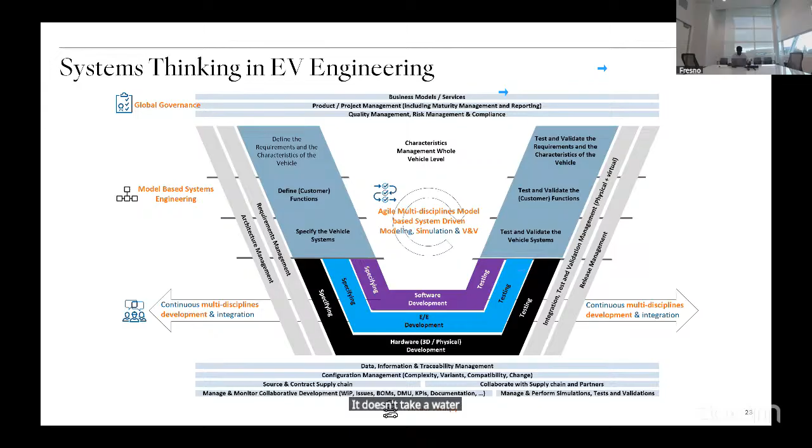Okay, at the end of the day, this is a business, correct? Now let's connect this entire concept to the business side, because system thinking is not just an engineering hobby. We are not doing it for a hobby. It is definitely responding to business needs. Most of the time, executives or leaders ask us these 3 things: Have you captured all the requirements very clearly? How can we collaborate better with our internal as well as external suppliers? And the classic question: how can we reduce the cost?

The value engineering team keeps on bugging each and every team. Hey, this is your cost target. Please try to reduce it as much as possible, because most EVs today, whatever product we deliver, are not very profitable, because we need to have the volume. At the same time, we need to always optimize as much as possible to reduce the cost of the vehicle, and that value needs to be cascaded to the market, so we can sell more cars. End of the day, it's all business, correct?

So systems engineering and MBSE directly address all those 3. We can capture our stakeholder needs not as textual documentation; we capture everything in terms of models. At the same time, we have to collaborate with multiple people, between the teams, within the teams, and outside of the company. For example, today Lucid works with 3 vendors. For our recent rideshare project, Uber is our end customer, we are the integrator, and we're getting some technologies from Nuro.

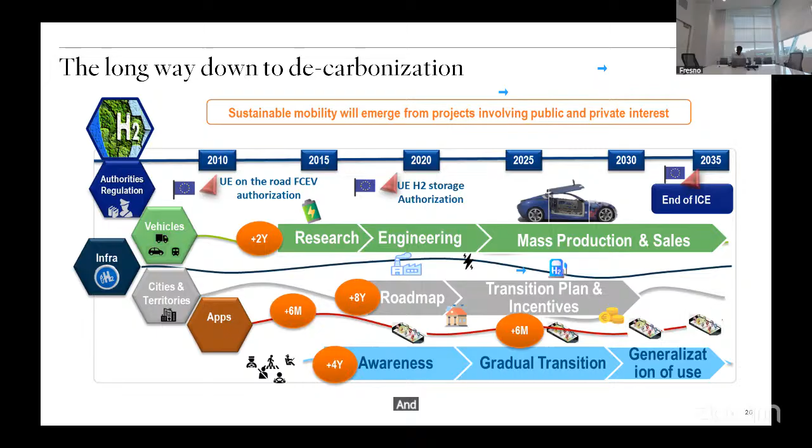Okay. This is a 15-minute topic, but due to the time constraint I have tried to simplify it as much as possible. So how do we make sustainability practical in engineering? By linking it directly into our system models. Sustainability we don't treat as an afterthought; we treat it as another requirement. Whenever we create requirements in early product development, we keep sustainability as one of the key requirements, like performance, safety or cost.

For example, when we model a battery pack, we include the cell chemistry impact and the manufacturing steps of the battery cells, as well as the thermal management, which drastically adds value to the battery pack and in turn gives a longer range. Of course, how much of the entire pack is recyclable, and what the potentials are. The same for motors: we consider the efficiency and the materials we source. And energy use across the system, as a car, over the overall life cycle. That's where range, performance and everything matter. With a smaller battery pack, I will give one example.

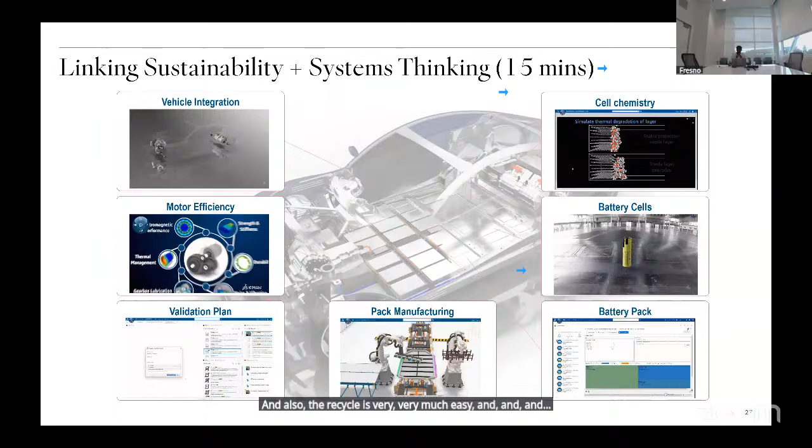Okay, if I try to reduce 5 kg of weight in a vehicle, it seems very small, correct? So my sustainability team is always giving the target to the engineers: as much as possible, we have to reduce the weight. Over the lifetime of the car, it definitely reduces the energy consumption very significantly, and also recycling is much easier, and this small change definitely helps us to do multiple sustainability events.

Okay, so the key takeaway here is sustainability is not just a checkbox for us; it is engineered into every decision throughout systems thinking. Okay.

Okay, I think we are at the conclusion stage. I think I have covered a lot through this more than an hour session. What we have done is, what sustainability means in terms of engineering: it's about creating systems that last, adapt, and deliver value in a very responsible way.

And something which we talked about, what is system thinking? It's a mindset, correct? System thinking is a mindset. It means looking beyond the silos, seeing the connections, and asking, if I change X, what is going to impact Y and Z, etc.

And also we explored model-based systems engineering. That turns the mindset into a practical way in our day-to-day practice. It replaces our entire documentation with integrated models. In the models, we capture the requirements, we do the behavior analysis, interfaces, we can clearly visually understand. And of course, by doing that, I am able to play around with different